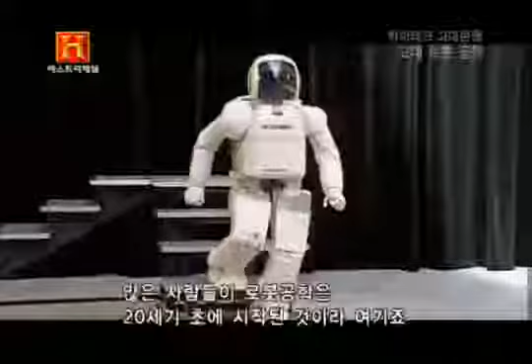A lot of people think that robotics was invented at the beginning of the 20th century. But there were proto-robots. There were a lot of proto-robots around throughout the centuries for 2,000 years. And without those, we wouldn't have any modern robots.

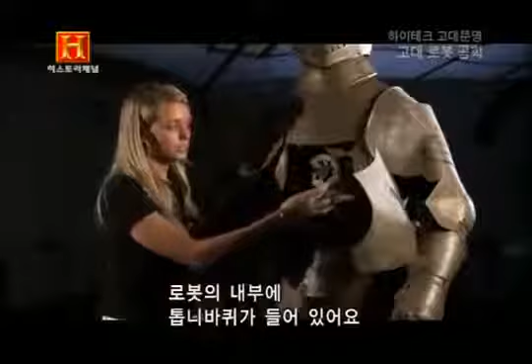This would be the movement of the arm.

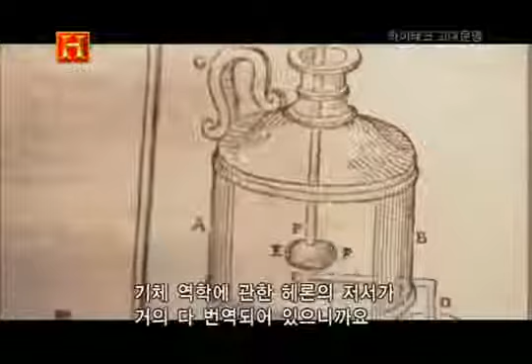We're very fortunate in having most of the translations of Heron's treatise on pneumatics, in which he talks about air pressures, water pressures, the interaction of the two. And in his treatise, he describes a number of objects which are based around these principles.

This piece is number 66, and he describes it as a vessel for dispensing a measured quantity of liquid, wine usually being the favourite.

Inside the vessel is a valve which is operated by this mechanism at the top, which in turn goes down to this lever which counterbalances the cup at the front.

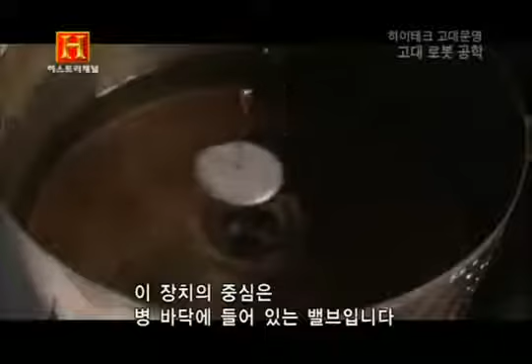The heart of the system is a little valve which sits inside the bottom of the vessel. The Greeks seem to favour these little conical-shaped gravity valves because they opened and closed very quickly. The little conical weight drops into the orifice of the valve when the cup is heavy enough, and this cuts off the flow of wine from the vessel to the cup.

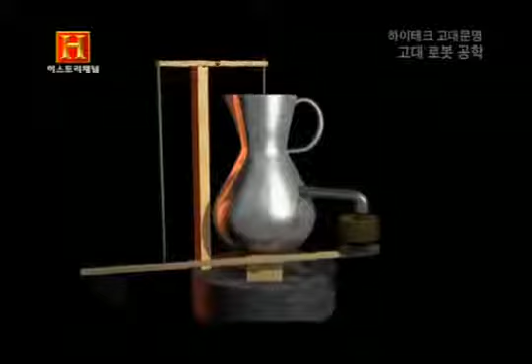Because the cup is balanced by the weight at the rear, as soon as it reaches a predetermined point, dictated by that weight there, the cup will then drop. That arm rises, the valve drops, cuts off the flow of liquid, and so that cycle of the process is finished. It's an absolutely fascinating design, and it's probably the first real genesis of control systems that we're aware of.

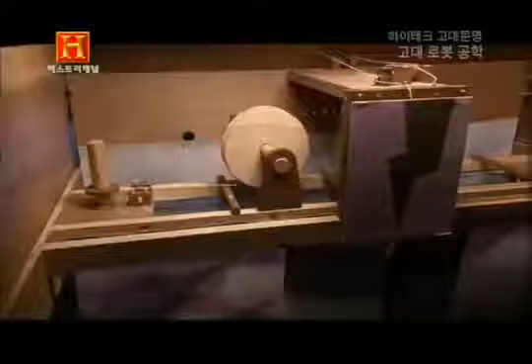Those strings are different lengths, and that determines when a mechanism is going to operate. So to change the length of a string will effectively program it to do something else.

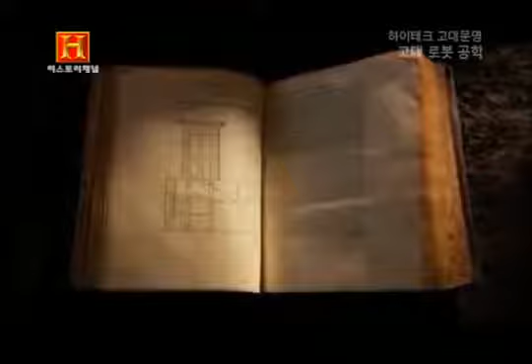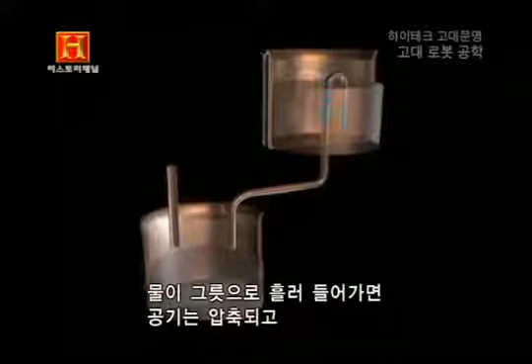세계 최초의 유압식 기계이다. One of Philon's favourite mechanisms appeared to be a device whereby air pressure is produced by water moving from one vessel into another. As the water runs into the vessel, the air is compressed and has to move somewhere, so it's usually piped to possibly a sound-producing or movement-producing device.

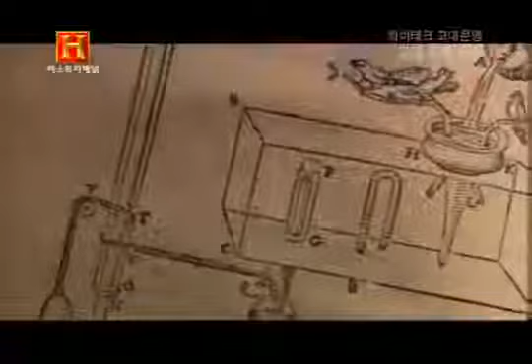We have reports from visitors to the Byzantine court of numerous mechanical devices, one of which was a tree which contained metallic singing birds. The model works on the basis of water falling from one vessel to another, displacing the air and blowing a series of small water warblers which are contained within the birds.

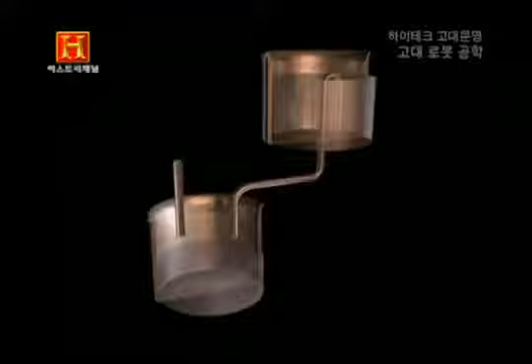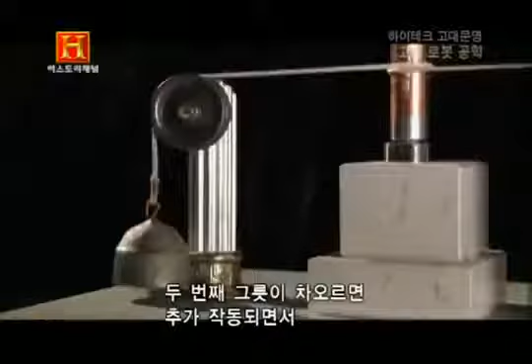When that container becomes full, it then siphons suddenly into the lower container. And as that fills, the weight of that vessel actually operates the owl, which then turns to look at the birds. As that lower vessel fills up, it reaches a point almost to full and then siphons. The weight then decreases dramatically because the water's going out. The vessel then rises under the influence of the counterbalance weight, turning the owl back into its original position.

This makes it a kind of loop system whereby it completes one cycle and then immediately resets itself and starts again. So as long as power is being supplied, the system will cycle continuously. And really, in a sense, this makes it perhaps a precursor of what we would now call a robotic machine.

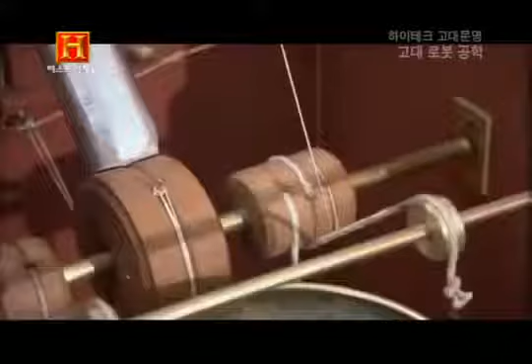Which presents the worshipper with a ball of soap, or in this case, pumice.

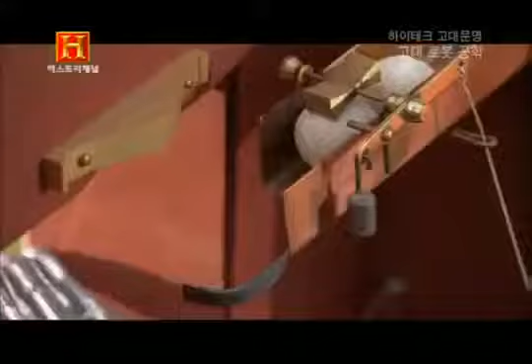After a few seconds, the vessel reaches its siphon point and it dumps the water in a fairly continuous stream for several seconds down through the device, through the pipe in the lion's mouth, thus allowing the worshipper to actually wash their hands using the pumice ball.

These examples of technology designed by Philon are some of the very earliest machines that we could truly call automatic. For a device which is something like 2,250 years old, this is just mind-blowing. It's a staggering achievement.

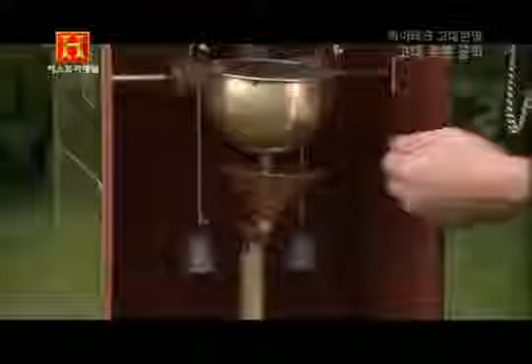One could argue that this device was the forerunner of the modern soap dispensers that you find in washrooms.

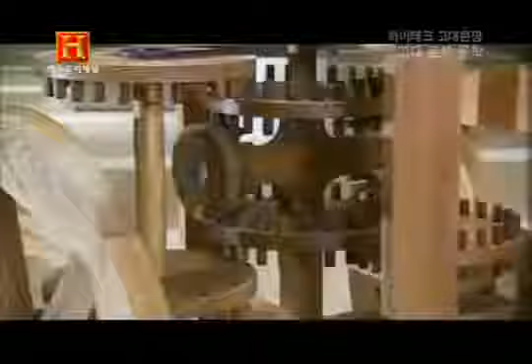베르헤이엔이 기계를 돌려도 맨 위의 조각상은 항상 같은 방향을 가리킨다. 수레의 방향과는 상관없이 말이다. 어떤 원리일까? It's a highly sophisticated geared mechanism which is very, very similar to the device that we find in almost every modern car, which we would now call a differential gear. The gearbox effectively is measuring the speed between two wheels. As one wheel moves faster than the other, as it does when turning a corner, it alters the position of a figure which is mounted above the chariot.

수레가 오른쪽으로 돌면 오른쪽 바퀴가 기계 내부의 톱니를 돌린다. 이때 중앙 톱니는 조각상의 방향을 바꿔준다. 오른쪽의 톱니가 왼쪽보다 더 많이 움직였기 때문에 조각상은 왼쪽으로 돌게 된다. 수레가 오른쪽으로 돌면 조각상은 반대로 왼쪽을 향하는 것이다. 그 결과 방향을 가리키고 있는 이 조각상은 항상 같은 곳을 향하고 있는 것처럼 보인다.

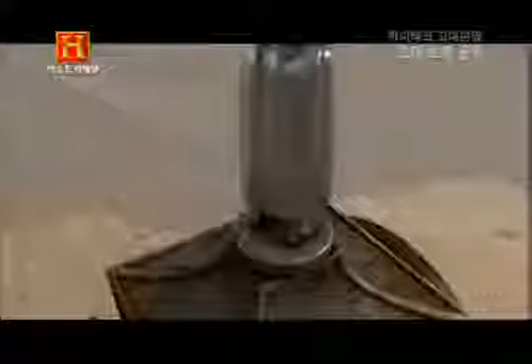No matter where the chariot moves, how it twists and turns, the figure should always remain pointing in the same direction. 고대 중국의 여행자들은 출발할 때 조각상의 방향을 맞춰놓기만 하면 여행 내내 수도가 어느 쪽인지 확인할 수 있었다.

To all intents and purposes, I think it'd be fair to claim that this is a robotic device. It was an incredibly important invention and has had a huge impact on the technology of the last 100 years in particular.

하지만 고대인들이 한 번에 다양한 동작이 가능한 기계를 발명했다는 기록도 있다. 사상 최초의 슈퍼컴퓨터가 1000년 전에 만들어졌다는 것은 사실일까? 고대의 로봇공학은 상당한 수준이었다. 하지만 동력은 어떻게 해결했을까?

If you go back 2,000 years, they didn't have batteries, they didn't have electrical outlets, and this was a real problem for them. 고대 세계에서 가장 얻기 쉬운 에너지원은 바로 물이었다. 그리고 물로 작동하는 복잡한 기계 중 하나는 훗날 신디사이저의 원형이 되었다.

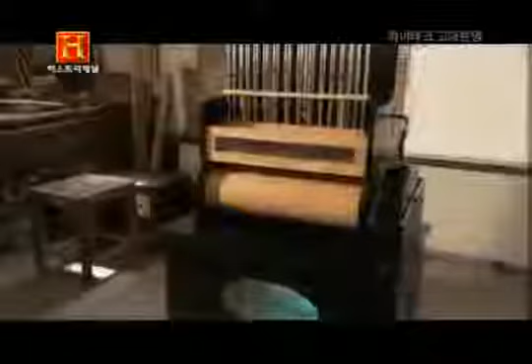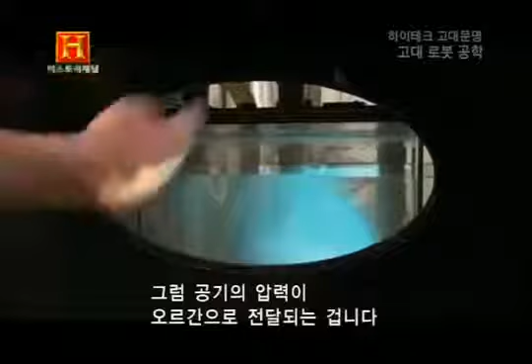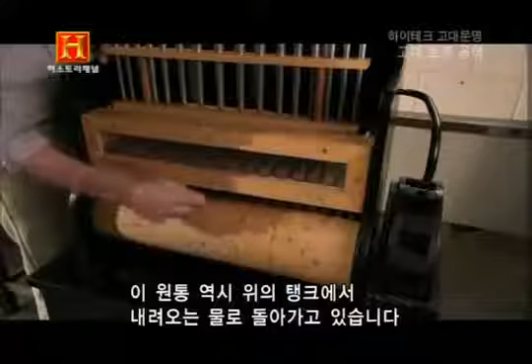로드니 브리스코는 고대의 기계에 매료된 사람이다. The water arrives in the top of the tank here, where it falls through these tubes. You get a vortex and it sucks in air. So you get a mixture of air and water then descending into the tank at the bottom, where the water would pass out and the air pressure would then be transferred to the organ. And the air passes up into the wind chamber here, where the cylinder turns. It's operated by the water wheel, by the same water from the tank at the top. It opens the valves and lets the air through into the pipes, and the pipes play.

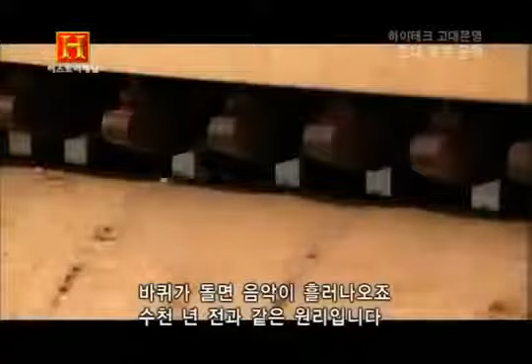Let's try it. 먼 옛날에는 물의 낙차를 이용했지만 오늘날에는 중력의 힘을 대신해 전기 펌프가 사용된다. The water is now entering the top chamber and falling down into the system below to create the air, and it's now turning the wheel and making the music just as it would have done thousands of years ago. 돌아가는 원통에 박힌 핀이 지레를 작동시켜 밸브를 열면 공기가 파이프로 들어간다.

하지만 고대에는 수력으로 작동하지 않는 기계도 존재했다. 대신 물은 그 기계 자체의 중심 요소였다. 카르나크 신전의 대규모 발굴 작업 도중 한 독특한 기계가 발견됐다. They came upon a huge cache of statues that had been buried at some point in antiquity. And among these statues was a very interesting item - an alabaster jar dated by inscription to the reign of Amenhotep III, and that's about 3,000 years ago.

이 오래된 단지는 흔한 그릇처럼 보이지만 여기에는 그 어떤 액체도 담을 수 없다. 구멍이 뚫려 있기 때문이다. Water would be put into the jar and would flow out at a controlled rate, and this served as a timing device. 단지 아래쪽에 작은 구멍을 통해 물이 얼마나 흘렀는지 알 수 있다. 사제의 일은 단지에 물이 얼마나 찼는지 보고 물을 채운 뒤로 시간이 얼마나 흘렀는지 보고하는 것이었다. 이것이 인류 최초의 물시계다.

그렇다면 고대에도 시간을 계속해서 측정할 수 있는 더 진보한 시계가 존재했을까? 완전 자동화된 시계는 없었을까? 400년 전 세워진 잉글랜드 옥스포드의 세인트 존스 대학 도서관을 찾았다. 이곳에서는 1000년 이상 된 문서들도 볼 수 있다. 옥스포드 대학교 동양학과의 에밀리 세비지 스미스 박사는 고대의 발명가이자 로봇공학자 겸 시계 제작자였던 사람을 연구하고 있다. 그는 바로 알자자리이다.

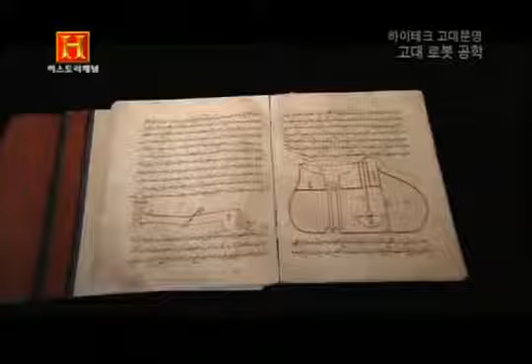이 문서 안에는 세계 공학사에서 최고라고 불릴 만한 정보들이 담겨있다. 알자자리가 직접 적은 내용이다. He's important because it happens that his is the only treatise that we have preserved today that does this.

알자자리는 중동 지역의 신세대 발명가 중 하나였다. 그들은 앞서 활동했던 알렉산드리아의 로봇 공학자들에게 큰 영향을 받았다. They had obviously read Heron of Alexandria, and we know that it was translated in Baghdad at that time. 알렉산드리아 학자들의 이론을 바탕으로 알자자리는 고대 세계에서 가장 복잡하고도 인상적인 시간 측정 기계를 만들어냈다.

고대 역사학자들은 두바이의 이븐 바투타 몰에 이 기계의 모형을 만들어 놓았다. 시계탑이라 불리는 기계다. 정기적으로 시간을 알릴 때마다 이 시계는 특정한 동작을 선보인다.

황도 12궁의 그림들이 시계 위쪽에서 회전하고 달은 위쪽으로 움직이며 문을 열어 현재 시간을 알린다. 매는 30분 간격으로 공을 떨어뜨리고 1시간 간격으로 로봇 악사들이 음악을 연주한다.

시계 뒤쪽으로 가보면 이 복잡한 일련의 동작들을 조종하는 기계들의 조합을 볼 수 있다. 물은 세워진 튜브를 통해 아래로 흘러내려간다. 이 통에는 물의 높이에 따라 내려가는 부유물이 있다. 이 작용으로 줄이 당겨지며 판이 움직여 황도 12궁을 작동시킨다.

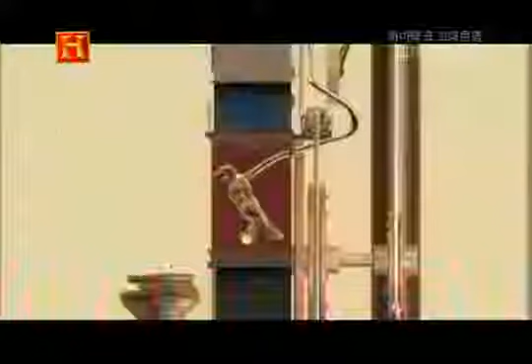줄은 초승달에 부착된 바퀴를 돌려 달을 함께 움직이게 한다. 바퀴에 달린 막대는 달이 지나가는 순간 문을 여는 기능을 한다. 바퀴는 지정된 자리를 지나면서 튜브 안으로 공을 떨어뜨려 매의 입을 지나 그릇으로 나오게 한다.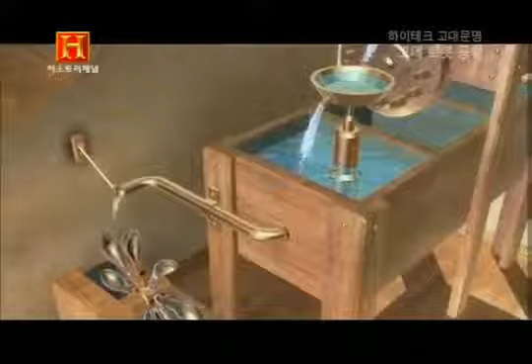한편 처음에 흘러내리던 물은 시계 안의 큰 그릇에 담긴다. 이 그릇이 가득 차면 물이 흐르며 바퀴를 돌리기 시작한다. 이 바퀴는 캠축에 연결되어 있고 캠축은 시계 앞의 악사들에게 연결된 지레를 쳐서 연주를 하게 한다.

놀랍게도 이 시계는 아주 정확했다. 시계 태엽 장치보다 수백 년이나 앞선 전기도 없던 시절의 발명품이다. 하지만 이 시계에서 주목해야 할 점은 그뿐만이 아니다.

중세 이슬람 사람들은 일출과 일몰의 사이를 12시간으로 나누어서 생활했다. 여름과 겨울의 일조 시간은 다르기 때문에 시계도 그에 맞춰 조절이 필요했을 것이다. 수정은 매일 필요할 수도 있다. 알자자리의 시계탑이 진정한 세계 최초의 프로그래밍 가능한 컴퓨터 자격을 얻은 이유다.

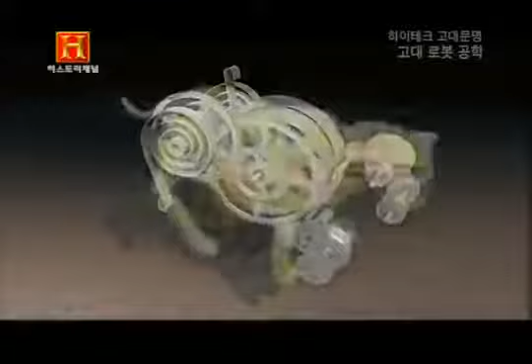Al-Jazari can be regarded as the person who invented the first robot. 하지만 이런 뛰어난 기술들 사이에서도 유난히 돋보이는 발명품이 있다. 바로 완벽하게 자동화된 고대의 자가 추진식 로봇이었다.

Throughout Chinese history, there have been stories of magical and fantastical machines that imitated human figures doing all sorts of activities. And the little gadget I've got here is actually of a serving girl, and the idea is that she will carry a glass of wine or drink to one of the guests at the dinner table.

이 모형은 정해준 길을 따라 식탁 앞으로 간다. 이 고대의 인조인간은 태엽을 감아 작동시키는 원리이다. 손목시계나 벽시계에 태엽을 감아 쓰는 것과 똑같다.

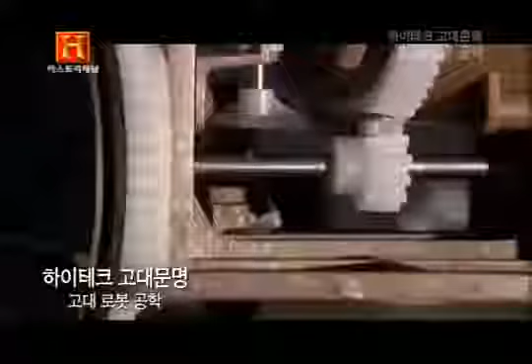이 용수철은 중앙에 큰 톱니바퀴를 돌린다. 중앙 태엽은 각자의 기능을 맡은 작은 톱니바퀴들과 연결되어 있다. 작은 톱니바퀴들의 복잡하면서도 정교한 상호작용을 통해 모형은 다양한 동작을 구사하게 된다. 훗날 유럽의 산업혁명으로 복잡한 기계들이 발명되기 수백 년도 전에 이루어낸 놀라운 성과다.

We should not be surprised that the ancients had robotic technology. They were not fools. They had mechanism, they had power, they had vision. 하지만 소녀 시종은 같은 동작을 반복할 뿐이다.

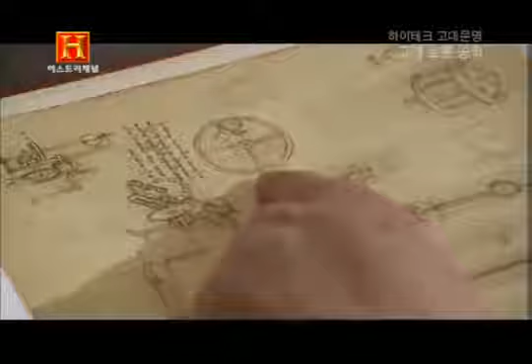진정한 자가 추진식 자동 로봇을 찾으려면 역사상 가장 유명한 발명가인 레오나르도 다빈치를 다시 찾아야 한다. 다빈치는 자가 추진과 조작이 가능한 로봇을 만들 수 있었을까? 고대 문서에 따르면 그는 이미 500년 전에 공식 행사장에서 프랑스의 왕에게 아주 놀라운 선물을 했다고 한다.

And we know for sure the King of France once witnessed the robot because it was a big celebration. 전선이나 다른 기기의 도움 없이 사자 한 마리가 사람들의 시선을 받으며 왕의 앞으로 걸어갔다. And it came out to the King of France, opened its chest and gave him flowers, and everybody was stunned.

오늘날 현대의 기술적인 연구를 통해 다빈치의 사자를 재현해내는 것이 가능할까? 기념비적인 도전이다. 하지만 다빈치의 로봇 사자는 그 설계도가 오래전에 사라져버렸다.

After Leonardo died, his manuscripts got spread everywhere. Lots of them got lost, about 2/3 of them, and lots of others got cut up and put in different pages. 이탈리아 피렌체의 로봇 연구실에서는 로봇 전문가인 로라 스티아테시가 최신 컴퓨터 모형 프로그램을 이용하고 있다.

The biggest problem was to produce a lion that had a range of movements, but furthermore, that all these movements would be powered by springs, without the aid of any motor or electrical input whatsoever.

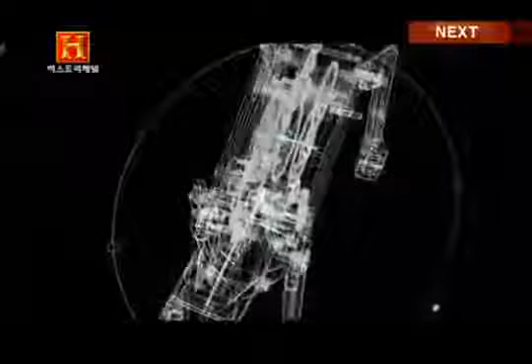학자들은 어떻게 사자의 각 동작들을 조작할 수 있었을까? 학자들은 사자의 모든 기능이 몸체에서 만들어진다는 것을 알아냈다. 이것은 코일 스프링의 탄력에 의해 작동되었다.

몸통 내부에는 각자 다른 기능을 하는 수백 개의 톱니바퀴가 있다. 일부는 머리를 움직이고 일부는 가슴을 움직인다. 그렇다면 각 동작의 순서는 어떻게 맞출까?

다빈치는 기어라는 기술을 적용했다. 현대의 기계에도 쓰이는 기술이다. 중앙의 큰 톱니바퀴가 회전할 때마다 다른 작은 톱니바퀴들은 그 크기에 반비례해서 속력이 빨라진다.

큰 톱니바퀴와 작은 톱니바퀴들 사이의 속도 비율을 조작하면 각각의 톱니바퀴가 어떤 속도로 도는지 파악할 수 있다. 이렇게 해서 각 동작의 순서와 시간을 조절할 수 있다. 사자의 동작들은 이렇게 만들어진다. 다빈치가 500년 전 개발한 기술이다.

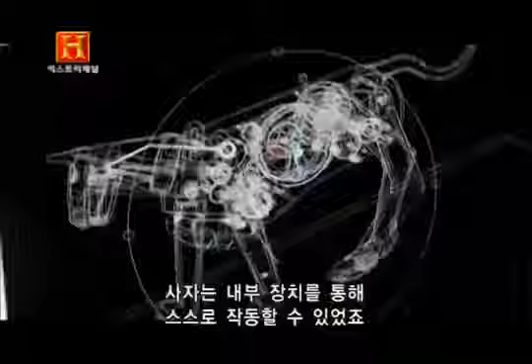The feelings that everyone who worked on the project had were similar to what it must be like for a mother to see her child walk for the first time. The satisfaction of seeing a machine powered by its own internal mechanics with no auxiliary power, petrol, or electricity was incredible.

배터리나 전기, 컴퓨터가 없던 시절에 고대인들이 이 정도로 복잡한 로봇 장치를 만들 수 있었다는 사실은 무척 놀랍다. I'm really impressed by the incredible skill of the early people. I mean, they did the real development.

알렉산드리아의 원형 로봇에서부터 다빈치의 마법 같은 기술까지 우리는 로봇공학의 역사를 비로소 이해할 수 있었다. The genesis of machines goes way back at least 2,000 years to the Greeks and probably a lot longer with the Chinese.

We have really precise engineering, but we wouldn't have that precise engineering without the crude engineering prototypes that were created by the geniuses of the past.

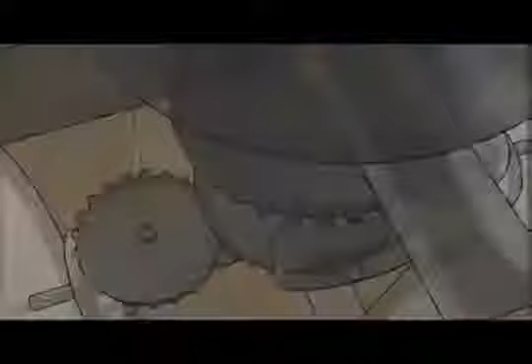오늘날 사람들은 우리 생활의 기계들을 우리가 만들었다고 생각한다. 과연 사실일까? 유압장치, 혁신적인 기계, 세계 최초의 인조인간, 이 모든 것은 고대 세계의 일부였던 것이다. 아직 밝혀지지 않은 비밀도 많으며 우리는 머지않아 다른 발명품들도 이미 수천 년 전에 존재했다는 사실을 인정해야 할지도 모른다.

장치 디자이너인 믹 켈리는 아일랜드 더블린에 이 색다른 극장을 재현해냈다. First they'll see the theatre with the doors closed, and then the doors will open for them and they'll see little men on the back of the stage making ships, and then hands will start to move and they'll hammer and they'll saw. 배경 그림이 제자리에 내려오고 배우들과 배경은 정확히 지정된 시간에 무대 위를 움직이게 된다.

헤로는 과연 이들의 정확한 순서를 어떻게 맞췄던 것일까? 놀랍게도 이 모든 절차는 한 번의 조작으로 움직일 수 있었다. 모래 튜브에서 스위치를 당기면 무거운 추가 떨어진다. 이 추와 연결되어 있던 캠축이 돌아가면서 줄을 당기게 된다.

And they make it revolve. And as that revolves, it pulls the other strings that are off that and winds them around it, shortening their length. 각각의 줄은 핀에 연결되어 있고 이 핀이 풀리면 배경 그림의 일부가 중력에 따라 떨어지면서 펼쳐진다.

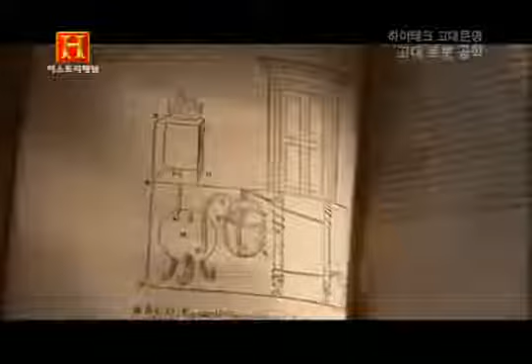헤론의 자동 기계에는 두 가지 기본 원리가 있다. 하나는 극장의 기계에 쓰인 것처럼 움직이는 추와 줄, 조정끈과 캠을 이용한 원리다. 하지만 헤론은 자동화 장치에 또 한 번의 혁신을 일으킨다.

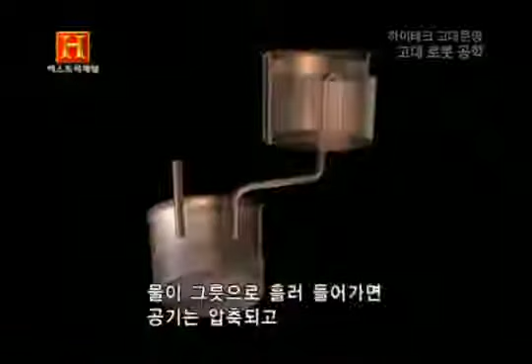세계 최초의 유압식 기계이다. One of Heron's favourite mechanisms appeared to be a device whereby air pressure is produced by water moving from one vessel into another. As the water runs into the vessel, the air is compressed and has to move somewhere, so it's usually piped to possibly a sound-producing or movement-producing device.

오늘날 이 기술은 공기역학이라고 불린다. Pneumatics is all about the way in which air and gas move and how air and gas can be used to move things. 헤론의 책에는 공기의 움직임에 관한 정확한 분석이 담겨 있다.

He knew the air had substance, it had volume, it was made of particles, and if you pushed it, it would have to go somewhere, and if you sucked it, it would come with you. 헤론은 자신의 이론을 실생활에서 쓸 수 있었을까? 그는 새들이 움직이고 노래하는 정원을 제작하라는 의뢰를 받았다.

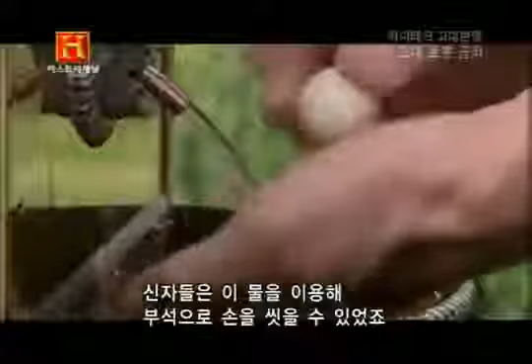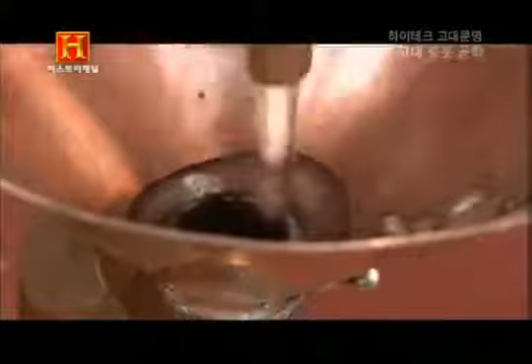To actually wash their hands using the pumice ball. These examples of technology designed by Philon are some of the very earliest machines that we could truly call automatic. For a device which is something like 2,250 years old, this is just mind-blowing. It's a staggering achievement.

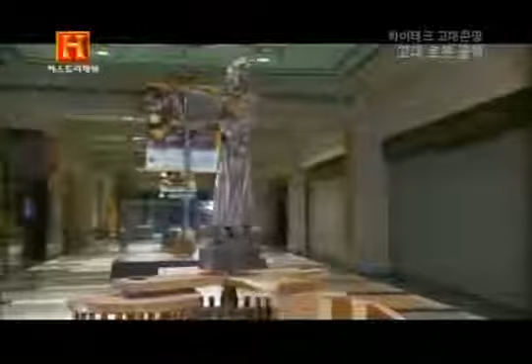It's a highly sophisticated geared mechanism which is very, very similar to the device that we find in almost every modern car, which we would now call a differential gear. The gearbox effectively is measuring the speed between two wheels. As one wheel moves faster than the other, as it does when turning a corner, it alters the position of the figure which is mounted above the chariot.

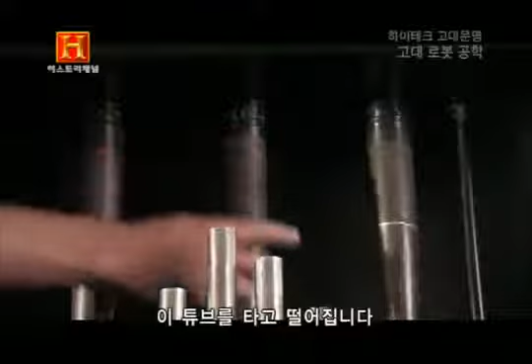The water arrives in the top of the tank here, where it falls through these tubes. You get a vortex and it sucks in air. So you get a mixture of air and water then descending into the tank at the bottom, where the water would pass out and the air pressure would then be transferred to the organ.

And the air passes up into the wind chamber here, where the cylinder turns. It's operated by the water wheel, by the same water from the tank at the top. It opens the valves and lets the air through into the pipes, and the pipes play.

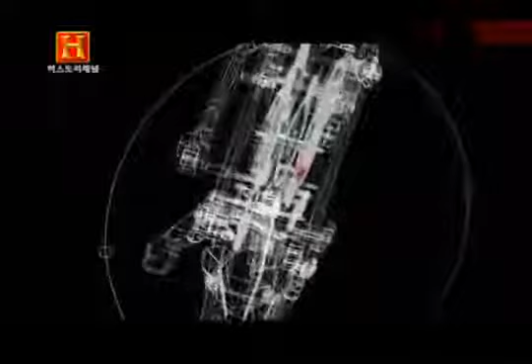After Leonardo died, his manuscripts got spread everywhere. Lots of them got lost, about 2/3 of them, and lots of others got cut up and put in different pages.

The biggest problem was to produce a lion that had a range of movements, but furthermore, that all these movements would be powered by springs, without the aid of any motor or electrical input whatsoever.

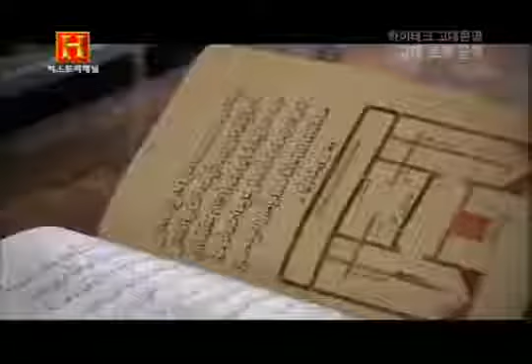Al-Jazari, in 1206, composed a treatise on ingenious mechanical devices, in which he described roughly 50 devices in great detail.

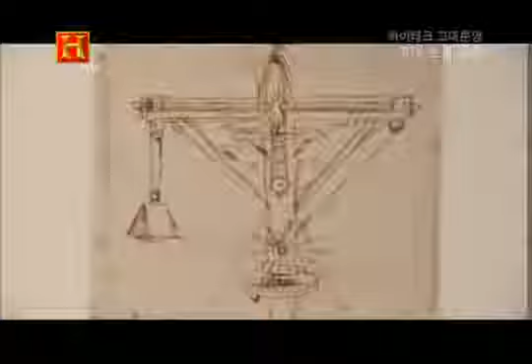So now what it's left us with is having to be detectives. It's a bit like an archaeological dig. We have to go in, we have to look at the drawings over and over and over again.

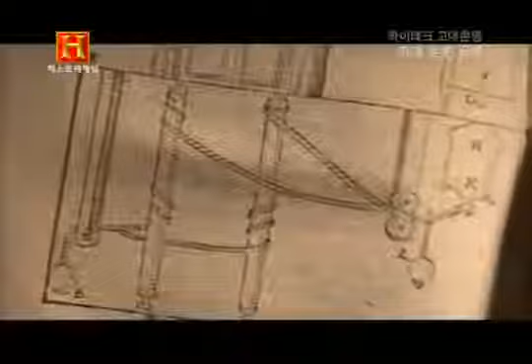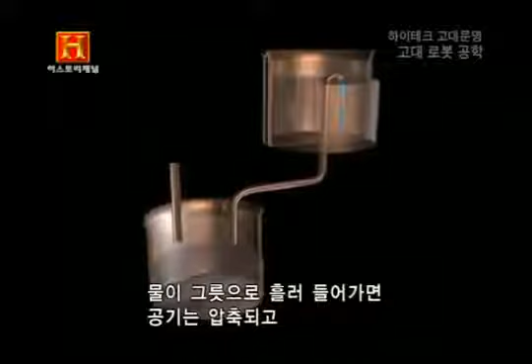One of Heron's favourite mechanisms appeared to be a device whereby air pressure is produced by water moving from one vessel into another. As the water runs into the vessel, the air is compressed and has to move somewhere, so it's usually piped to possibly a sound-producing or movement-producing device.

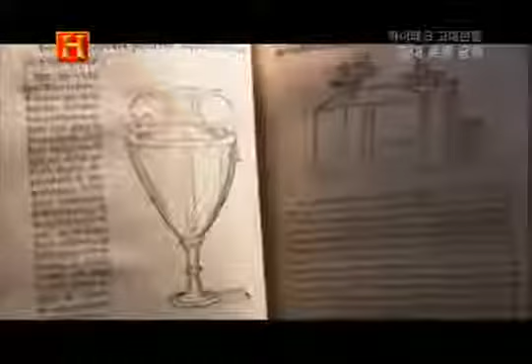Pneumatics is all about the way in which air and gas move and how air and gas can be used to move things.

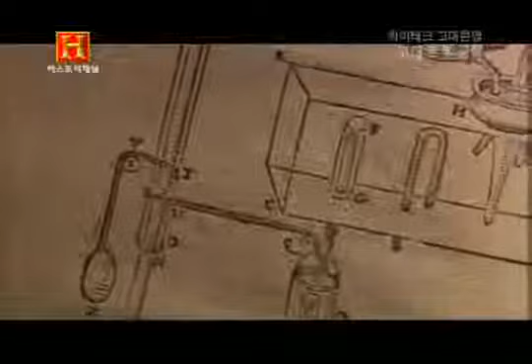We have reports from visitors to the Byzantine court of numerous mechanical devices, one of which was